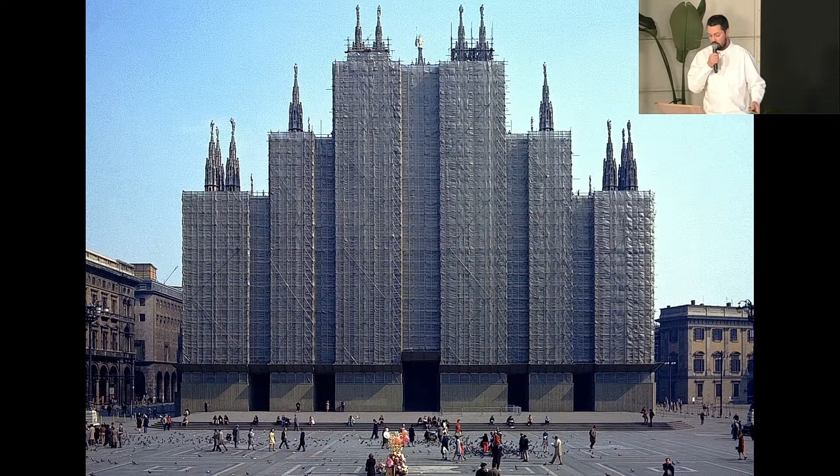Now I will show you a couple of spreads from this book. The obvious area where these structures exist is construction. The interesting thing is that scaffoldings and the things which precede buildings are sometimes much more progressive and innovative than the buildings erected behind them. For instance, this is a scaffolding of Isaac Cathedral in St. Petersburg, built 200 years ago, before the existence of modernism and all the new movements of architecture, and it looks much more unique than the building it hides, creating completely unique conditions.

Sometimes it also helps to hide things, and we all know these kinds of huge structures which stand in cities for years. Here we speak about the permanence of something temporary, hiding enormous construction sites, but excluded from the perception of citizens because they are just labeled temporary.

These structures also facilitate and help us do what architecture fails to do. They help us deal with climatic problems, such as the situation of Swiss melting glaciers, which was covered with thousands of square meters of textiles, or whole streets in Bangkok, where we used to teach, which were covered with this textile to provide more comfortable climatic conditions. Or probably all of you know these structures which appear during periods of Acqua Alta in Venice.

Obviously, safety comes first, and these structures, no matter where they appear, in which historical context, are always allowed to be as bold, as contrasting, and as radical as possible, because it's explained as needed for safety, needed for insurance companies, construction companies, and so on. They create completely unique conditions, and we all know these passages in probably all European cities which stand there for 10 years, but we never question their presence, their aesthetics, or their colors, because they're again labeled as temporary.

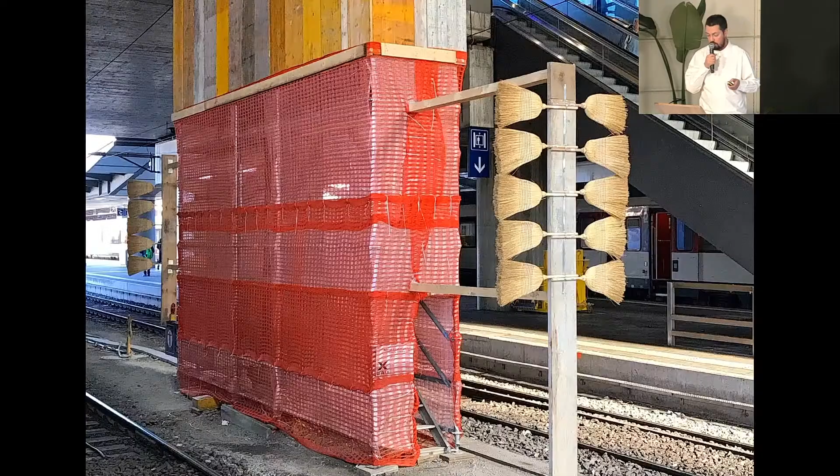And sometimes they come to quite unique examples, like this case in Switzerland with brooms which protect the trains. They sometimes look more decorative than the most exotic examples of postmodern architecture, but this decoration and ornament is purely functional. For instance, here the red lines basically prevent the workers from hitting their head, so it's marked with the color. Sometimes these ornaments come purely from structural reasons.

Sometimes, like these fumigation sheds, when buildings are cleaned by fumigation, they create completely exotic examples of architecture which are more expressive than some of the most radical works of Zaha or Frank Gehry, but they're done purely for these practical reasons.

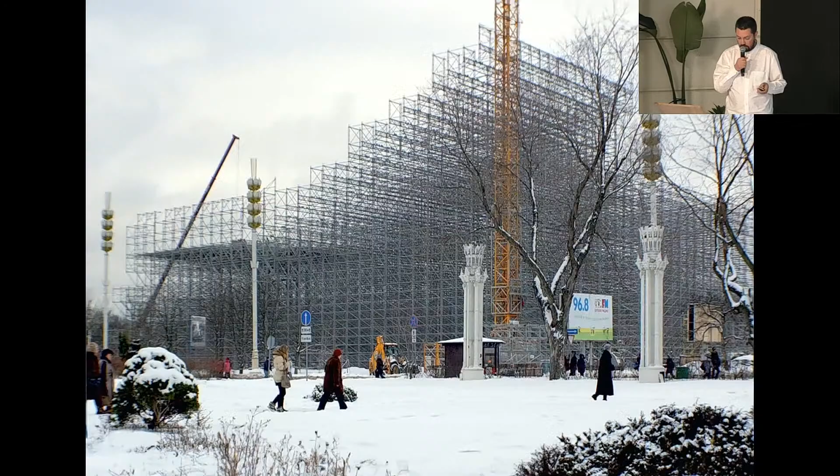They facilitate events, and they have a human scale, because they need to be deconstructed after these events happen very quickly. We can also learn that architecture at quite a big scale, which is constructed very quickly, can be done for deconstruction, for démontage. I will mention more about this later in our work.

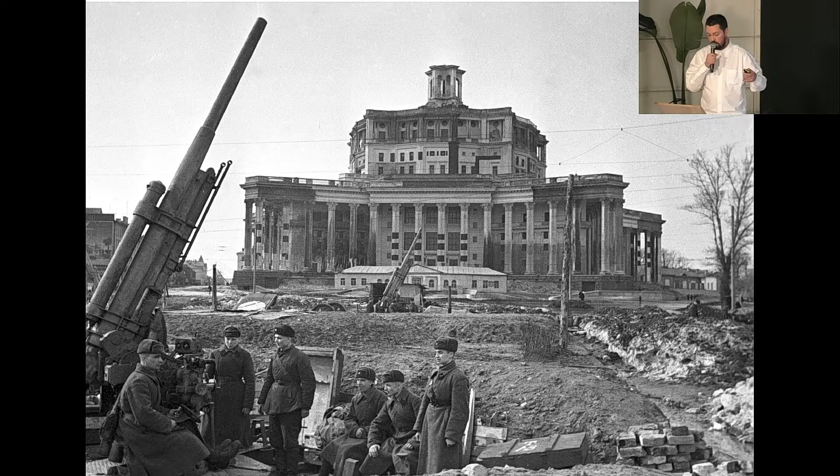And also, obviously, it protects cities during wars. Here is the suspended ceiling for American airplane production, or here it's kind of a drawing, like a layer of paint drawn on a theater during the Second World War, to pretend that this theater is a series of small buildings so it avoids bombing by Nazi aviation. It also protects buildings structurally, examples from the First World War and, today, the monuments covered in Ukraine. And also during social conflicts, like these boarded windows during the so-called Gilets Jaunes protests in Paris, which covered all the elite boutiques from the riots.

We can conclude that in a way this is a contemporary vernacular architecture, because it has the logic no one would carry scaffolding, these type of structures, from thousands of kilometers away for purely aesthetical reasons or for the choice of an architect. They are inherently ecological, smart, and economical.

Here we can see, for instance, bamboo scaffolding, a beautiful invention very used in Southeast Asia, which covers quite a generic building behind it in Hong Kong. This is another example of this vernacularity, the Swiss so-called Bauprofile, the markers of future existing buildings.

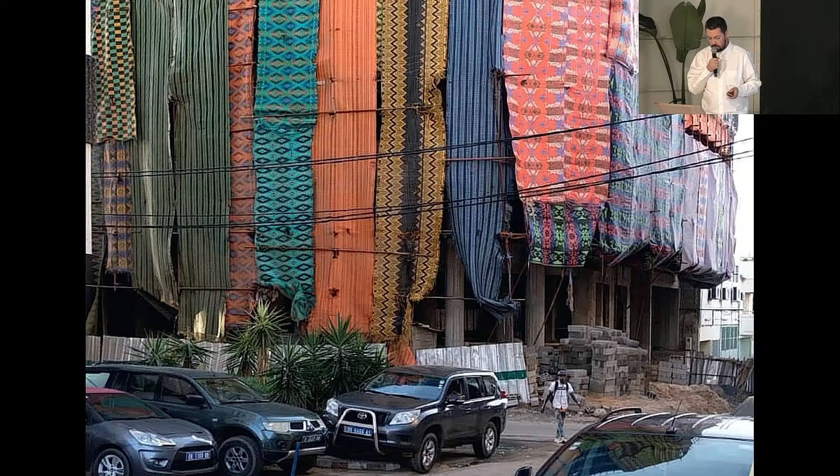To conclude this book, we make the point that these structures, we can really learn from them, and they create a certain new order. Similarly to how the Roman or Greek order came from construction techniques, all these structures create a certain new order that we can learn from, from its rationality, its modestness, its efficiency, its ecological concept of design for disassembly.

It basically doesn't leave a trace and can be reused in future. So everything we speak nowadays as designed architecture, what we are trying to do, already exists in this type of architecture. So I invite you to look through it, as it is now out in print.

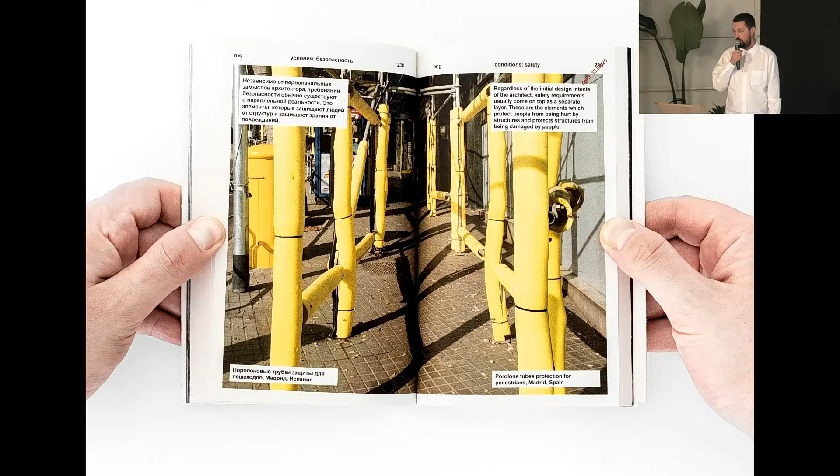So this type of architecture was many times our reflection and source of inspiration for our projects. The first important project in our office, which we did long ago in 2014, was called Emma Space, when we were requested to rethink an existing old factory which came out of function, a factory of medical instruments, but with an extremely low budget, and it was supposed to be transformed into a public cultural space.

We started to think of a strategy, and what we saw is that the whole territory had this kind of outdoor rooms, the spaces in between the buildings. So the strategy was to use these rooms and create a series of outdoor spaces, leaving the interiors almost untouched for this cultural cluster.

So we did this physical model where, as you can see, in all of these pockets, this is a building, but in the model we take away the building and leave a continuous wall, which we decided to unite these outdoor spaces into a series of courtyards.

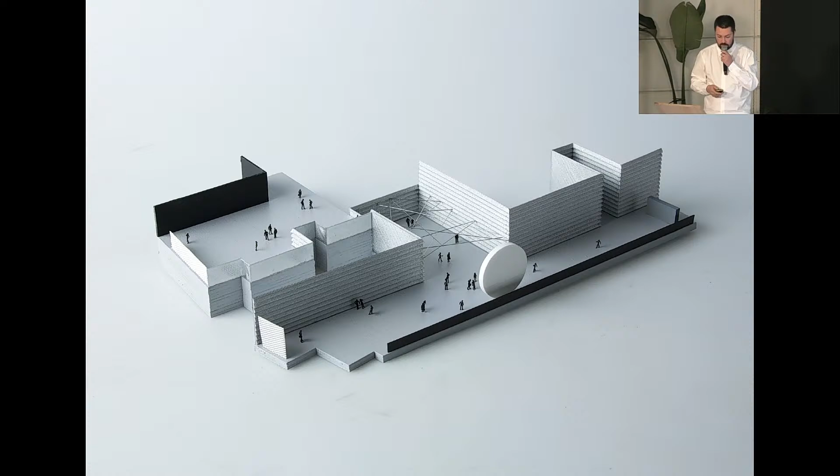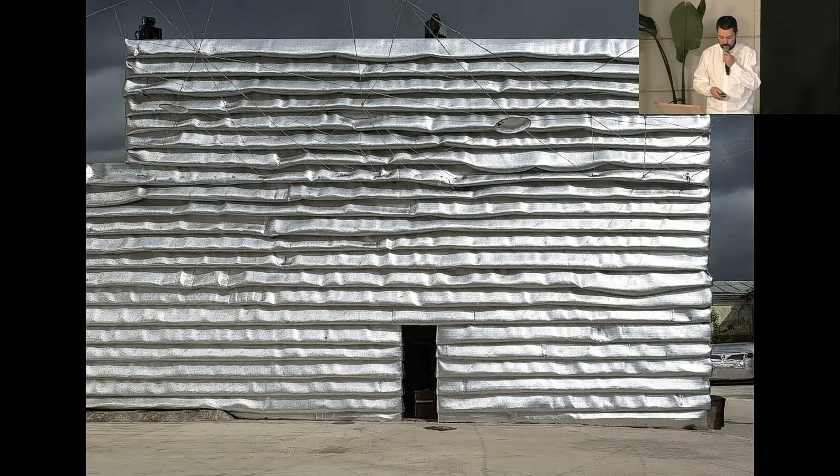In order to achieve this, this was one of the atmospheric renderings we did in the beginning, when we didn't know how to activate these courtyards, how to activate these open spaces, but we had this first inspirational image, and we decided to cover the whole space, including the windows, with so-called insulation foil, which is used for insulation of facades and roofs.

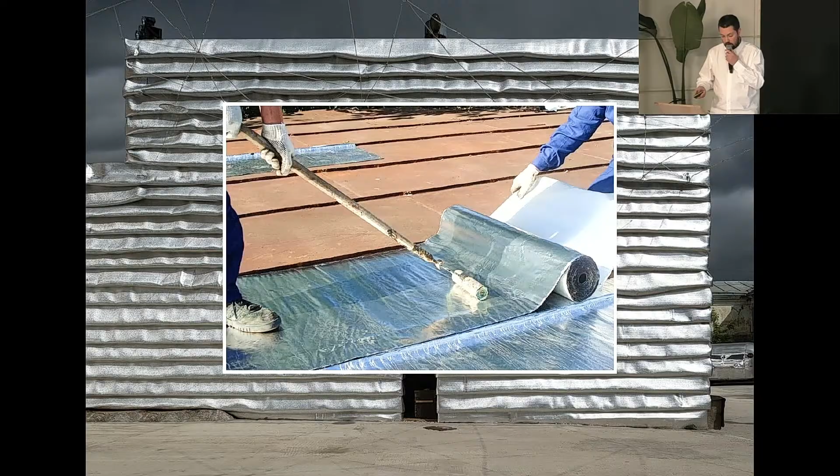We created this kind of detail in order to create a total atmosphere of this cultural cluster in this space, activating these courtyards for events, lectures, parties, and so on.

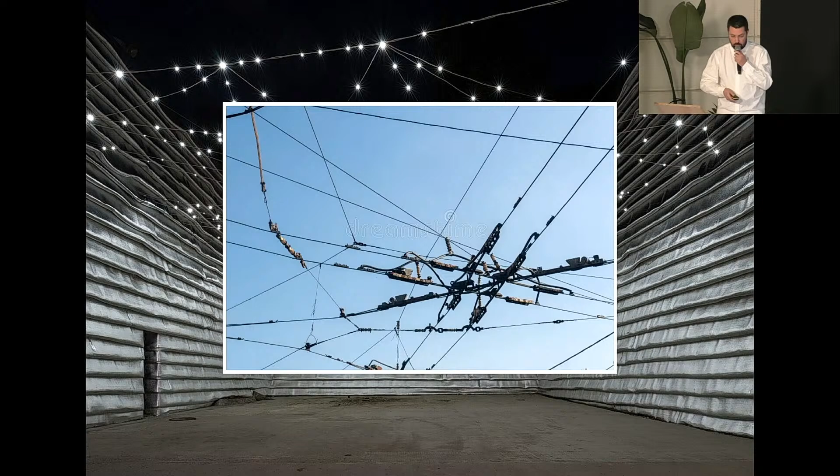Another solution we proposed in all the courtyards was this suspended luminous sky, referencing trolleybus wires, activating the space with a series of reflectors and lights. To make it more theatrical and to make a point, we created this huge disc which became the center of activity in this place.

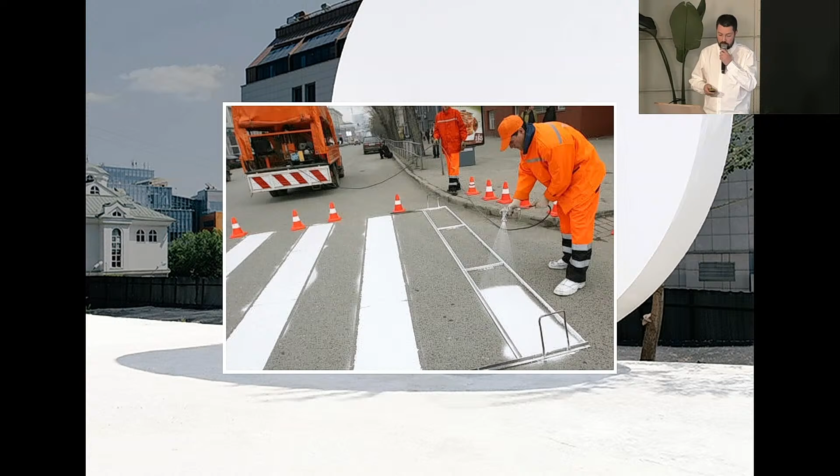It was a 9-meter-high, wide disc, used as a background for theatrical performances, music performances, DJs, and so on. It has this kind of unrealistic white color, because we used the road marking material, used again in infrastructural safety lining for cars, which has these white reflective particles inside, creating the illusion that this moon or disk looks more fake, more theatrical, and more like a cardboard moon than it actually is.

So it became quite successful back then, the project, and it was the first time we realized the power of social media and the tagging of the place. We realized that this physical and digital reality, which is now completely a norm, but it was just 10 years ago, that the digital is actually more important than the physical, because the space was later disassembled, but it left a digital trace. Inside, as I said, it was not at all touched, but through the cheaply renovated interiors you would pass to these courtyards, and even the people would be part of this installation.

The next project I would like to show today was built in Barcelona, and that's how I also appeared in the city and met some of you. It was called Permanently Temporary Pavilion, and we did it for Model Fest two years ago in collaboration with Parabase Architects, our Swiss-Catalan colleagues.

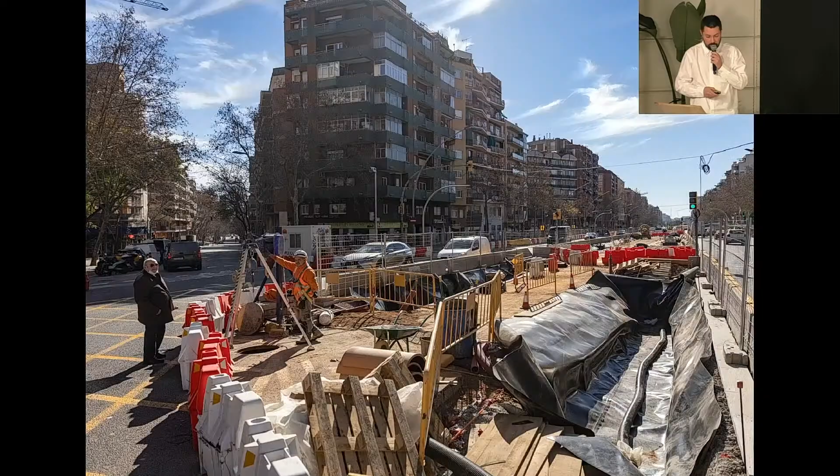The topic was called Entry Materials, and the question we put to ourselves was revealing the hidden resources of the city, because we constantly demolish more and more and build new buildings. But sometimes we can stop and look at an image like this, where we can see thousands of idle construction materials lying there. Together with our partners and the organizers of the festival, we decided to visit around a dozen different city civil storages of materials around Barcelona.

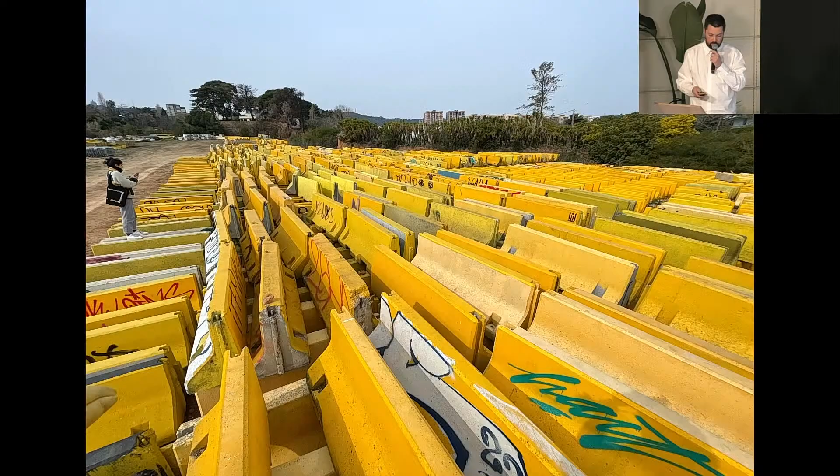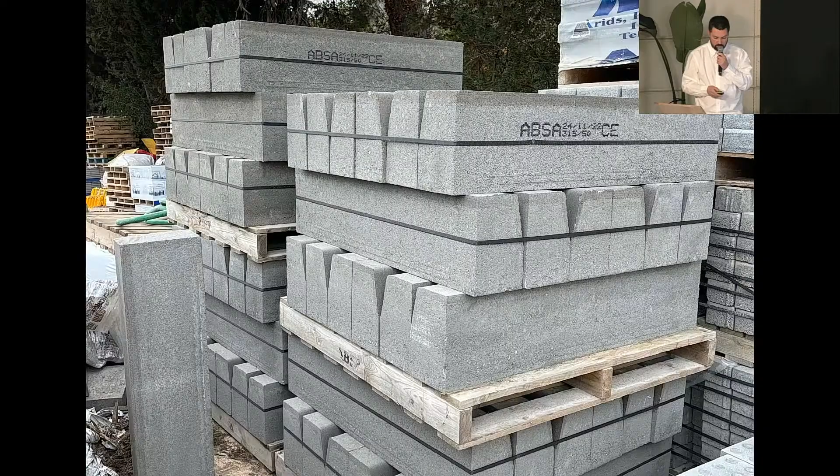We went to all the peripheries and started to realize there is an immense stock of completely new materials lying there for years and months without any need. There's lots of mineral materials. There's a place with 2,000 jerseys, which you probably all know as the typical road barriers, all types of woods and pipes, tons of asphalt. Some materials are even new, and they stay like this for years, waiting to be able to replace broken materials.

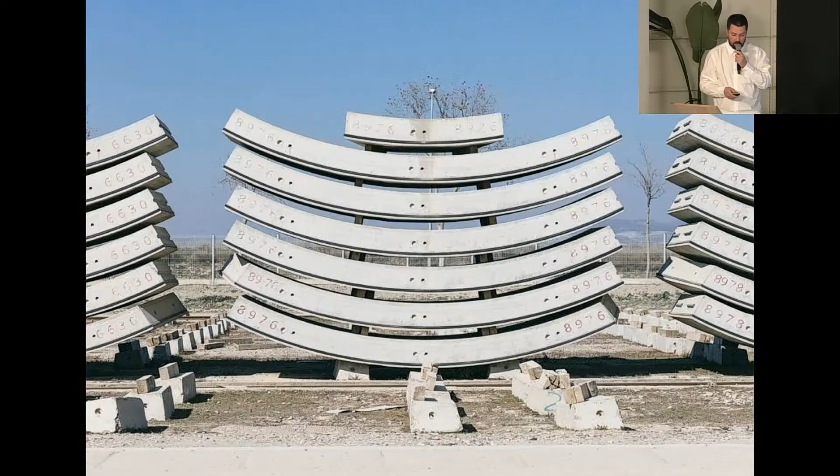We even found one concrete tunnel, pieces of which were given to us by the Sorigué company for some time, because they made a technical mistake, and they had thousands of these panels for a concrete tunnel lying somewhere, waiting for who knows what. Also objects that come out of season, because when you need to put water out, sometimes in winter you don't need these buckets.

One of the most exciting was, of course, the storage of the historical. Similarly to all these concrete blocks, there's also a huge storage of historical statues and historical elements, which we saw with the city of Barcelona, where we could choose a statue for temporary use. One beautiful building was this spiral, which Guillermo once joked was a 'trash Guggenheim' — like a Solomon Guggenheim museum but full of unused trash. We even saw Gaudi doors, and probably you all know the leftovers of Enrique Miralles' Tir amb Arc.

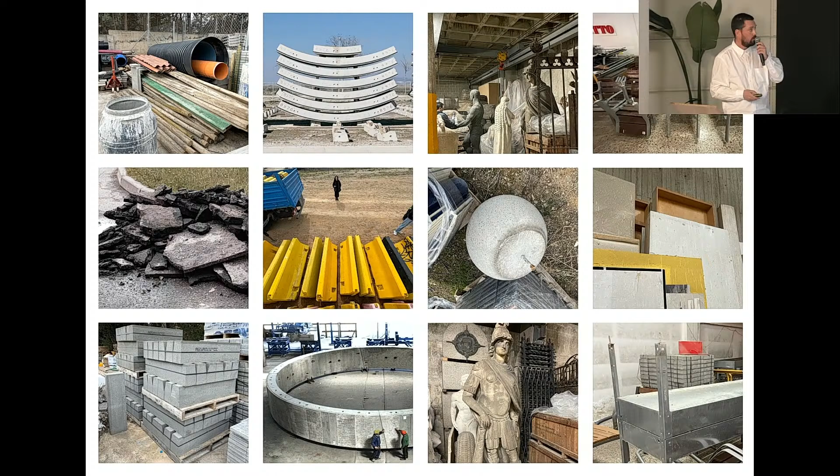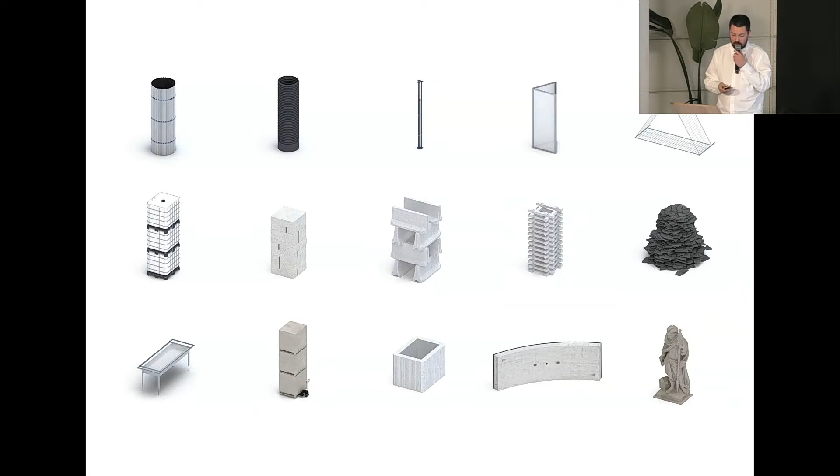After collecting, let's say, a catalog of all these materials, we carefully selected some of them, and the majority were mineral elements, because we wanted to underline that these temporary elements don't need to always be made out of temporary plastic or wood — if you just borrow materials, you can use any of them. And we created a pavilion which was standing in the Park of Glories.

The point of this pavilion was to inform the city of Barcelona about this phenomenon, to invite discussion on this topic. So it was used for different cultural events. Inside, the central column was made out of these water storages, so it looked like a lantern, and it was also the gateway to the Glories Park.

As you can see, it is a construction net creating a shadow, based on a series of mineral totems of different materials, and inside there was an informational table about the topic I've just discussed. In the evenings it was used to celebrate the thing.

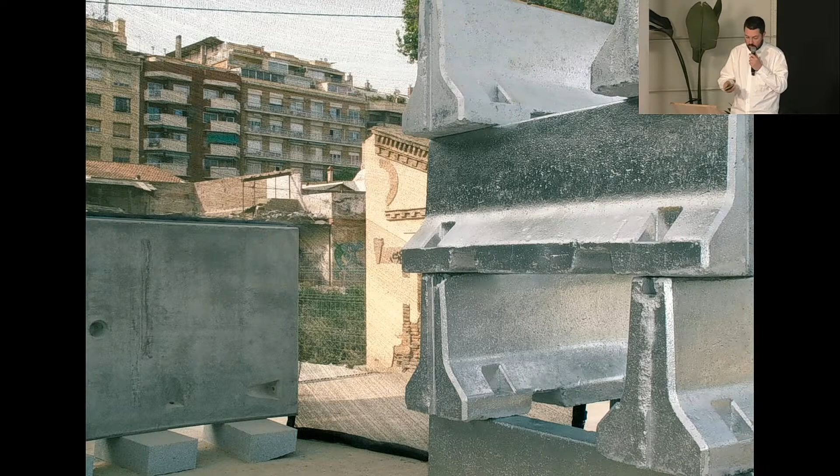For us it was also important to show that by rethinking the materials, we don't need to always use them the way they're prescribed by conventions and architecture standards. For instance, a sculpture can serve as a column, and the net used for scaffolding can be used as a roof. The jerseys can serve as storage space. It was very important for us to show this dialogue between the temporary and the permanent — we created a certain language with black lines of this temporary net hugging these mineral stone materials, including benches made from stacked asphalt plates.

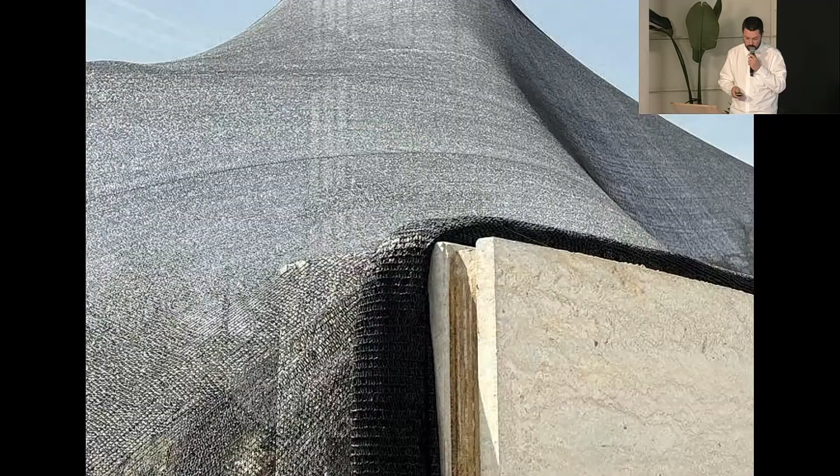We also did a couple of workshops here with the Barcelona people in order to use all the materials we collected to create a series of furniture objects. So it was a bit like an educational project as well. And most importantly, the whole pavilion was fully disassembled and went back to all these multiple storages.

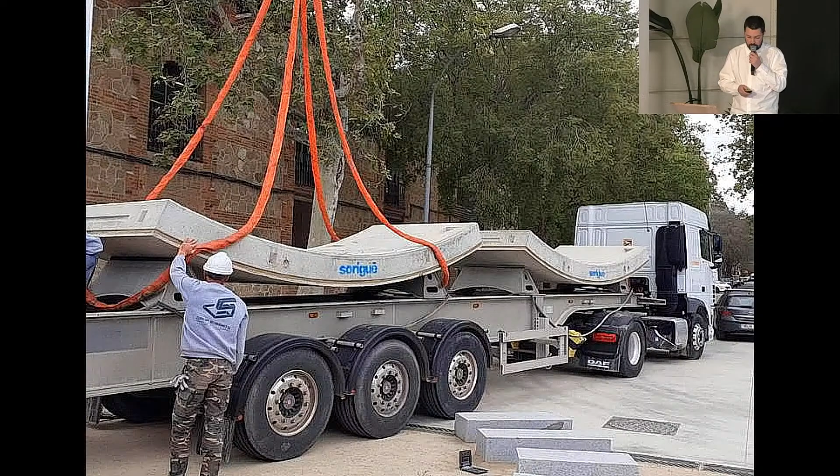This shows these Sorigué plates coming back, for unclear reasons, laid down somewhere in the fields.

But thinking about this concept, we started to think more and more, and now I'm even teaching a semester dedicated to this topic: how can we use this concept of disassembly in much more serious structures, not just a small pavilion with a free function, but in real construction.

Here I'd like to present a competition project we did in collaboration with Jan De Vylder, Inge Vinck, and Professor Philippe Block from ETH. It was a tower competition, an office tower designed for the city of Zug, a small, quite innovative city in Switzerland.

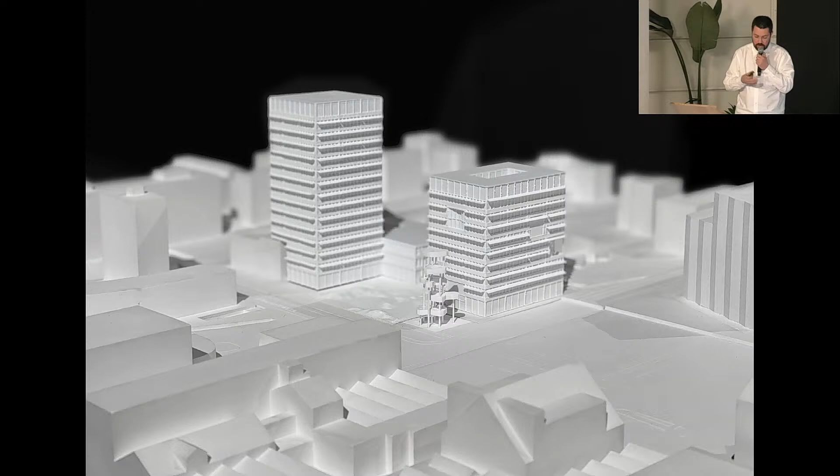The point was they wanted an office tower, but due to COVID, offices are now idle. We thought, really, another office tower, when we know that in a couple of years maybe this function won't be relevant? So we decided the tower should adapt to future changes, anticipate other functions, and even potentially be disassembled. We were given these two quite simple volumes—this is already the final project, but the geometry itself was not questioned.

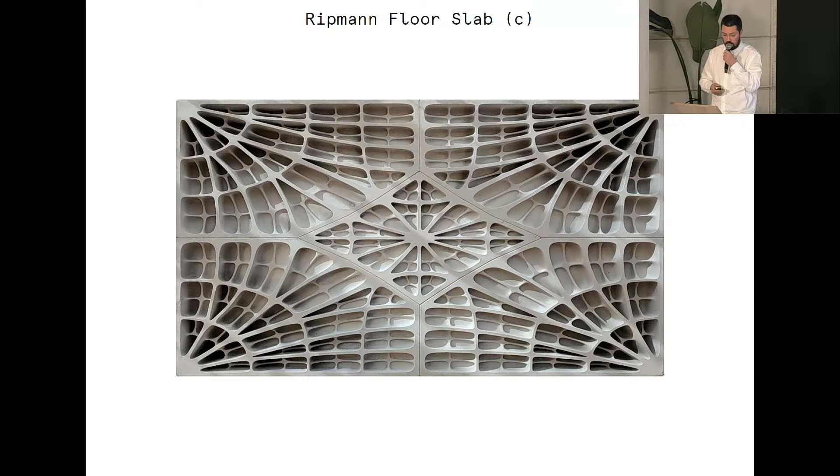We started with an invention of this gentleman, Professor Philippe Block, a very good engineer and architect from ETH Zurich—check out his work if you don't know it. He works with very thin stone and concrete shells, and in particular he invented the Ripmann floor slab.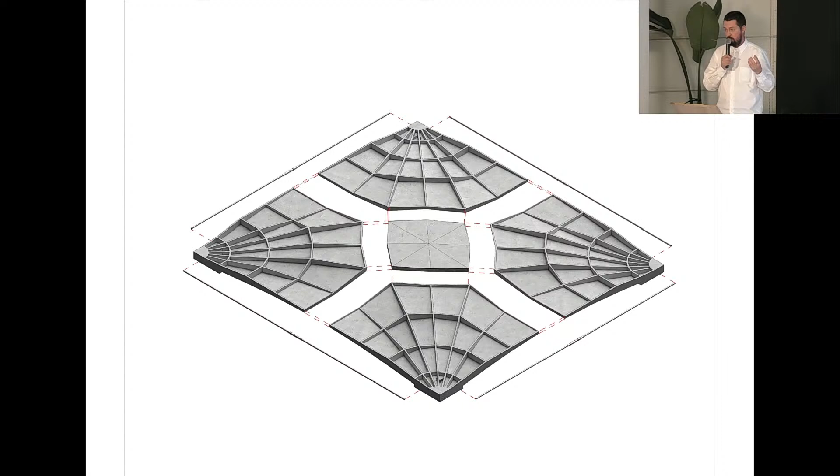Here is an adapted version for our project: a slab which works on the same principle as the vaults of medieval cathedrals. Thanks to these ribs, it's much more stable, and therefore it reduces the amount of concrete used—up to 40% less than a normal flat slab.

The amazing thing is that this Rippmann floor slab works like a simple arch with a keystone in the middle, which allows full disassembly.

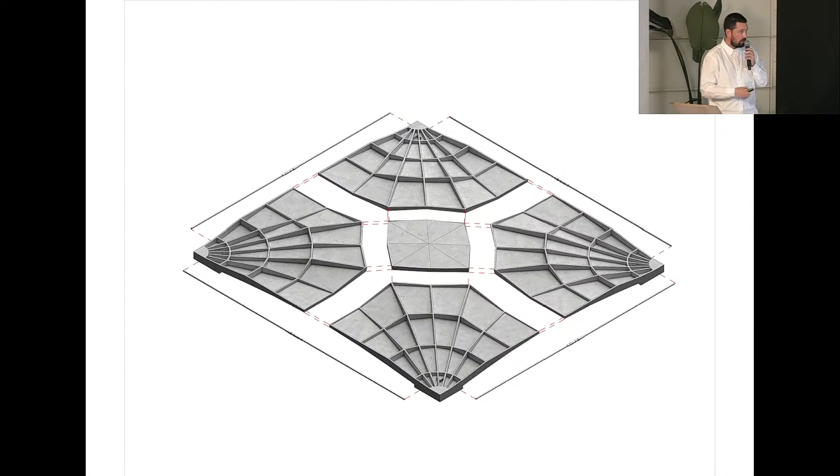So we started thinking further about the layout of the project—here's a little diagram. On the left we call it the Miesian skyscraper, in the middle is something like the Lloyd's building by Richard Rogers, and we wanted to propose a new way of organizing the cores.

If I think about why we lost this competition, maybe it's because we touched the idea of moving the core. This was also part of the competition's premise—that in the future not only can the building be demounted, but even the cores, which seem to any architect like completely unmovable objects, can potentially move.

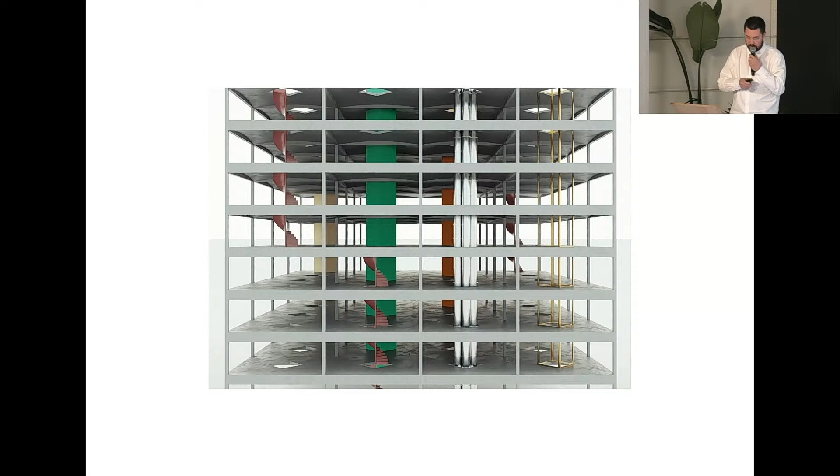Thanks to the slabs being organized in plan, you can theoretically shift the cores both in plan and in time.

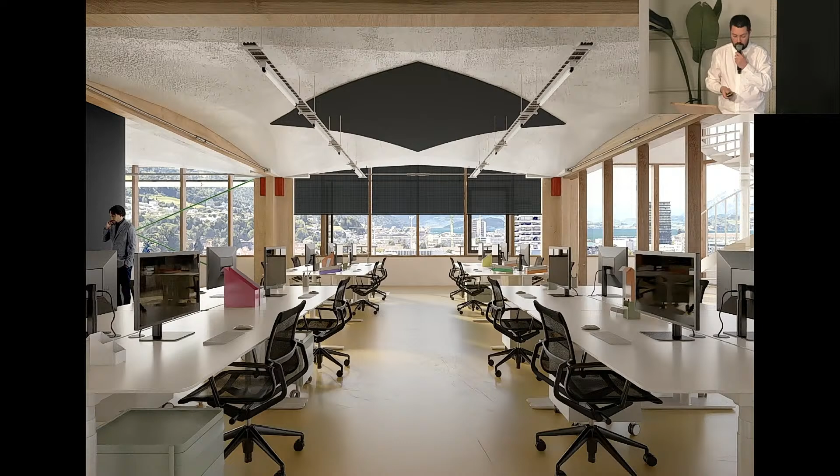Here you can see the interior of this project, showing an acoustic panel that covers the middle keystone. Together with the ZPF engineers, here's a little explanation.

We came up with the idea that the whole building should be made out of wood, and also fully disassemblable wood.

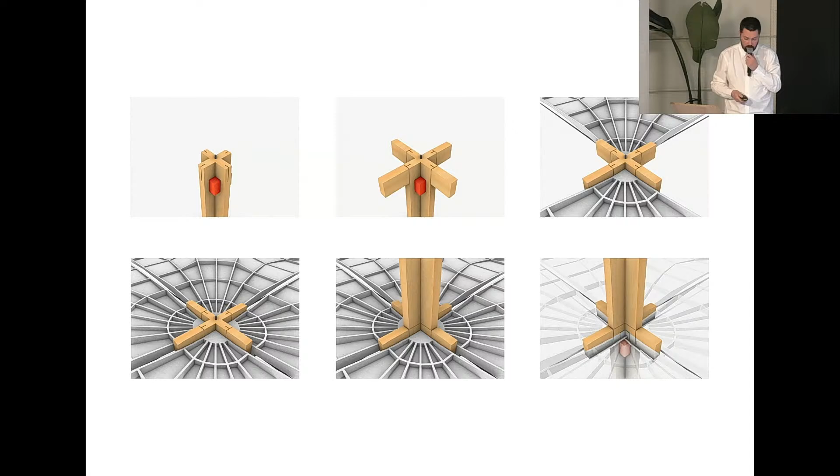Here you can see the joint combining the wood load-bearing carcass—the bones of the building—with the Rippmann floor slabs. Here's another zoom in, and that's how it looks in the interiors.

And further on, all the facade elements, the solar panels, the idea was that they also potentially could be disassembled. The outside look of the building is pretty simple, but as you can see with lots of joints, it underlines this idea of future disassembly.

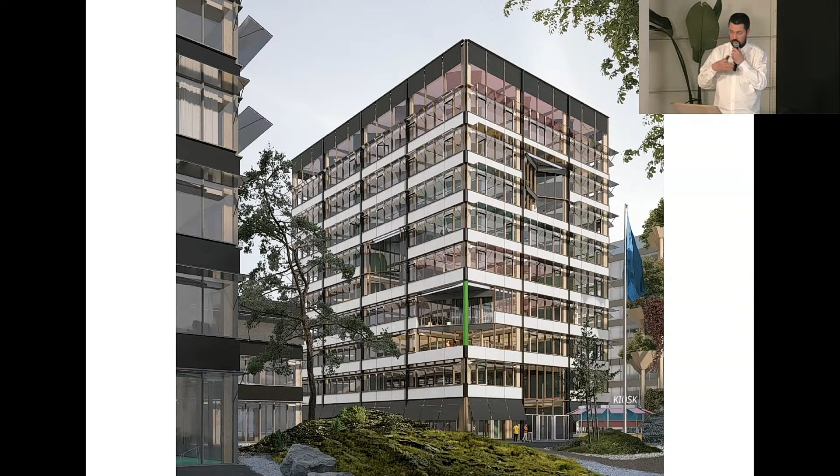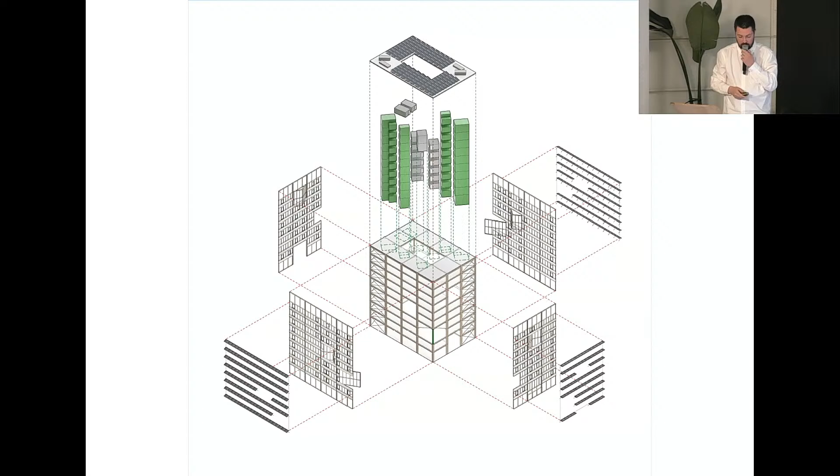And it also allowed us to introduce a series of atriums and niches inside the whole building, which can go, so you can disassemble a whole module of the building, allowing double height spaces to appear all around the building. And here you can see the exploded axon with all the elements that I have mentioned.

And inside we try to also, equally to the logic which I spoke about in the exterior, underline all these details of construction, which would then become the ornamental elements of the design.

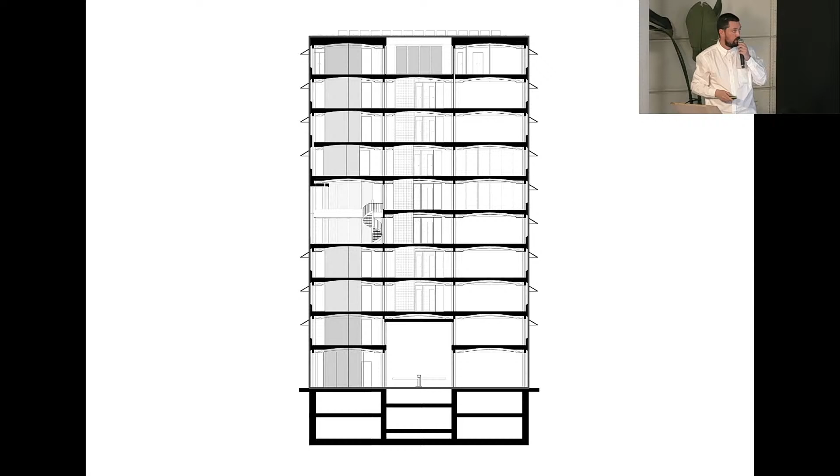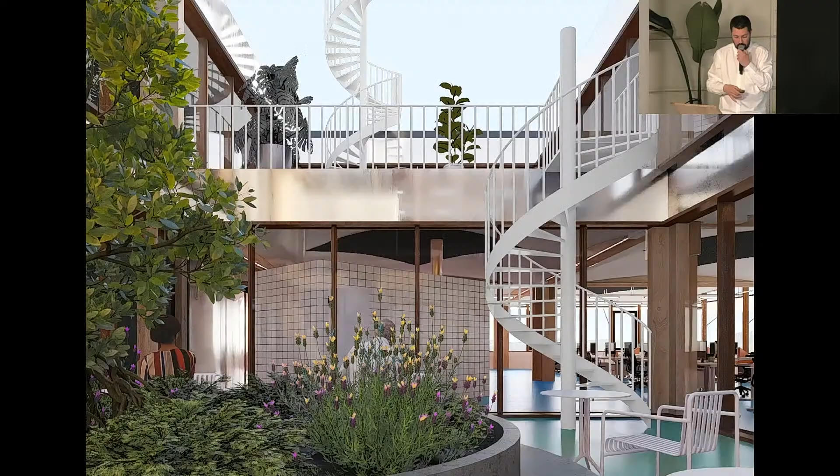And here in the section you can see the kind of migrating double height atriums in the space. And here are just a couple of examples of these double height areas in the buildings, which could theoretically in future change their place and function, including also a rooftop kind of recessed area, which is also thanks to the fact that here the slabs are fully demountable.

So this was the project where we tried to really address these issues in a serious, big construction project. And at the same time, unfortunately, this project didn't win. I think maybe it was too complex in this sense, although we all believe that it's fully doable. But obviously this type of thing, coming back to a different scale, is much easier in small projects.

And here I would like to show you a little project we did in Logroño for Concéntrico Festival, which is called Off-Season Pavilion.

You probably all know Logroño, the place of winemaking, and we wanted to show the infrastructure behind this industry, which goes behind this postcard wine production, these images where you drink wine on the street. But actually behind these touristic appealing images of Logroño, which we all know of Rioja, there's a whole industry of winemaking.

And we found out that there's so-called jaulones de vino, humongous metal cages for wine, which look like this, and they can host hundreds of bottles.

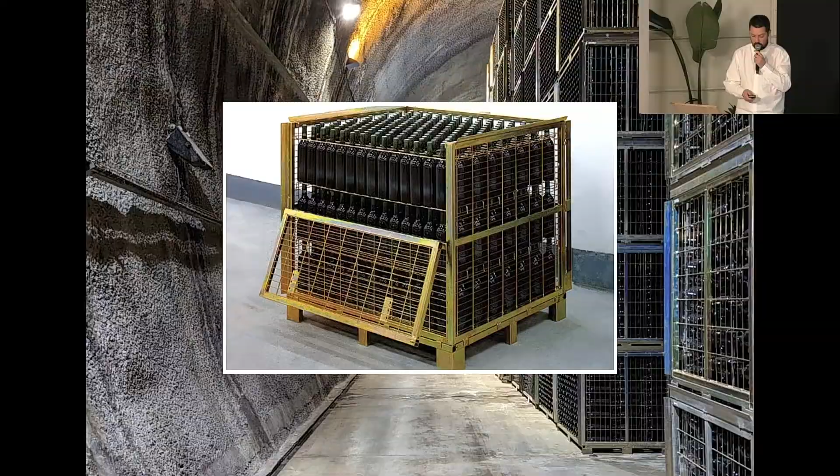And the most interesting thing is that we went there in winter, and they're standing literally more than half a year out of use. So there are thousands of these cages in the outskirts of Logroño which stand out of use.

So after contacting the producers, we decided to use them as the only element for our pavilion, and created a little public space, a little pavilion, fully made out of borrowed jaulones de vino, creating a little kind of replica, like a little mini chapel or baptisterium, with no big function.

So it was a very simple construction, also with 3 naves, and they were simply put together in order to create a temporary public space, a temporary shadow, and a place for people to gather.

And the interesting thing is that, as you know, the Concéntrico Festival has a very small budget. It's a small festival organized by the city, but thanks to the idea of just purely borrowing these cages and disassembling them later, it allowed us to exceed the budget like 50 times. So if we would buy these materials, it would be extremely expensive, and it was purely for free thanks to the producers of these wine cages, and it served its purpose.

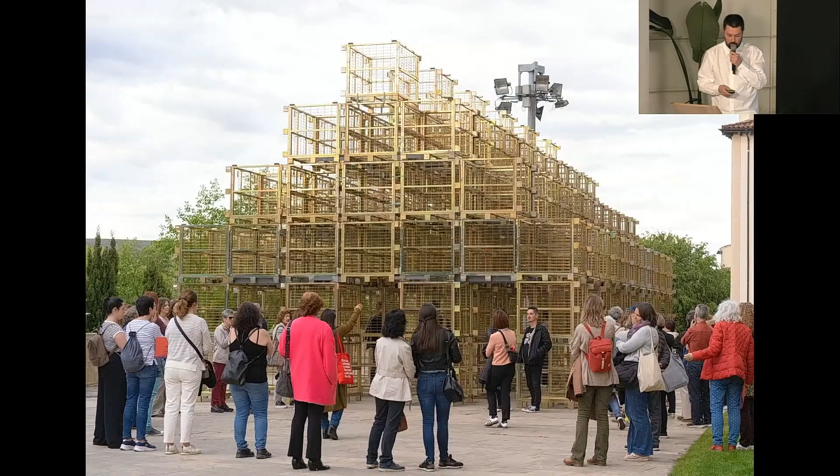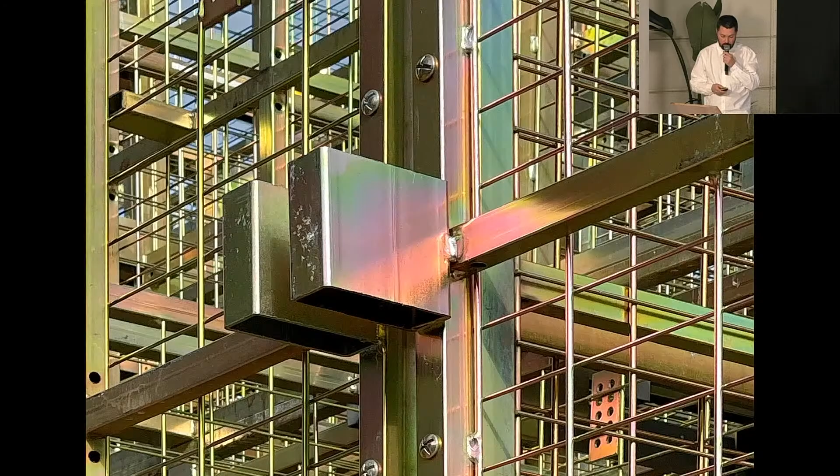It gathered people together. It created a nice space and a nice play of shadows and light. And what was also quite impressive is the way it's produced. So thanks to anodizing, it has an amazing color.

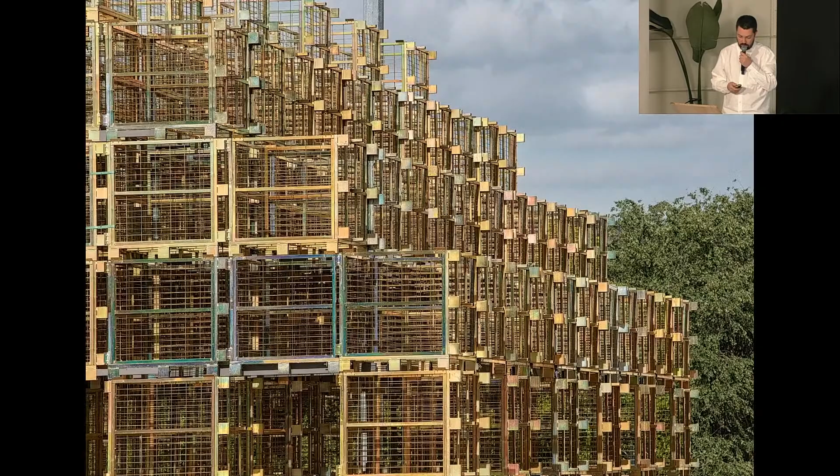And we did not treat this material anyhow. It was right there in this play of colors, and you can see all the shades from dark blue to pink. And they purely appear because of the practical treatment of these cages.

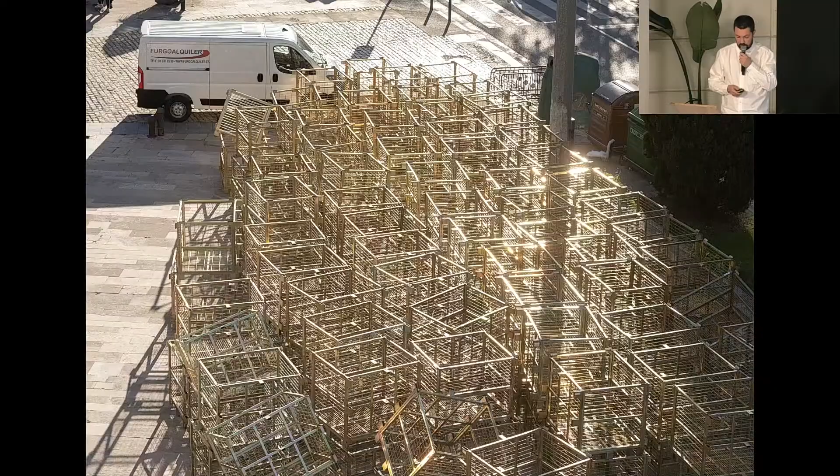And later, as with the previous projects, these cages were disassembled and went back to serve during the season to store the wine.

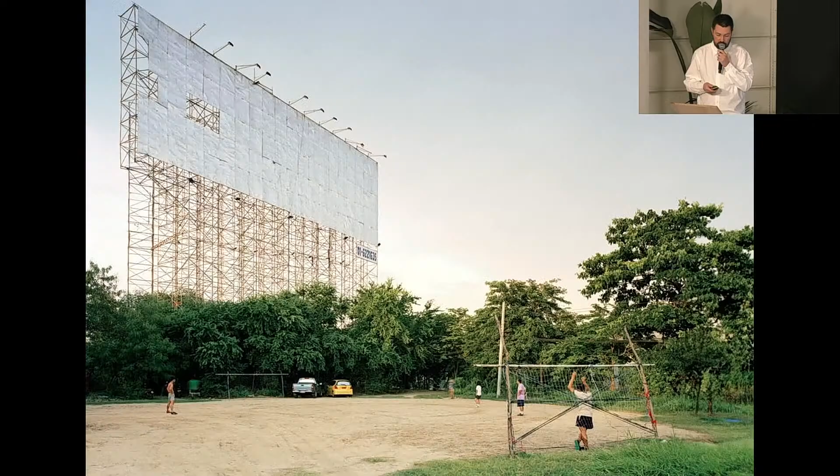Maybe to finish this chapter of temporary buildings, I'd like to show you a sports center, which was a temporary building designed very quickly for an event. This event was the World Football Championship, which was in Moscow in 2018, and it was a very big but very quick event. Designing a temporary pavilion for this, we thought: how do we build this structure, but how can it withstand into the future? We thought of a reference of a billboard, a simple infrastructural element which is easily constructible and serves the maximum purpose with a minimum of means.

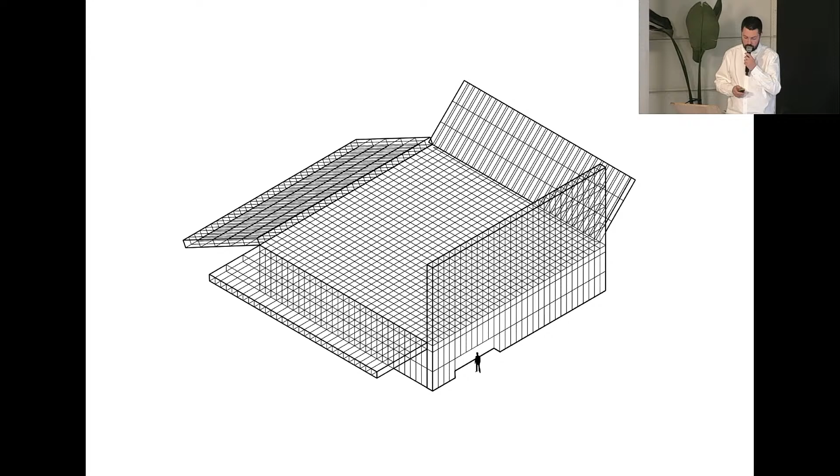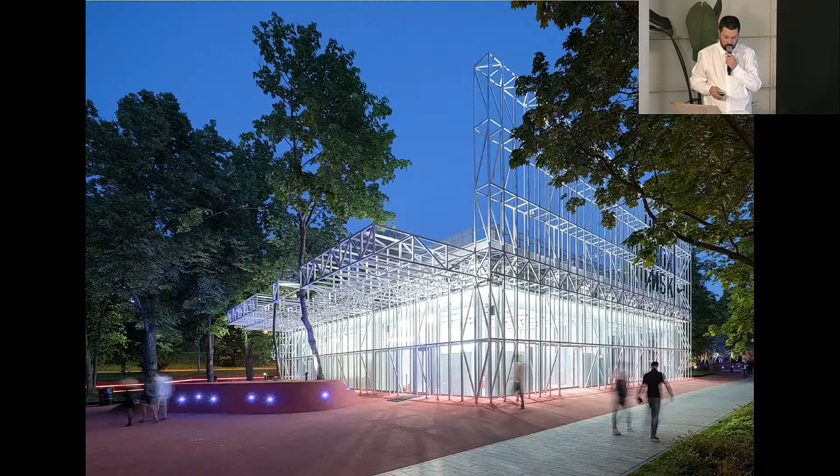We tried to make a kind of billboard infrastructure for human activities, and created a simple box with 4 different elements which can host different functions. One of them served as the score table, one was used for people to go up to the roof, one was a cover for the running club, and one served as a billboard for this event in this building.

This building was built as a temporary construction in Gorky Park, the central park of the city. It was built with a very shallow foundation, and the idea was that it doesn't cut any trees, so indents were done in it.

It served its sportive function. There was a gym, a training room, showers inside. It also served as a public space, and the shadows it created formed a series of climatic layers in order to protect the interior from overheating.

In this project, we called it the concept of the naked building, the building which reveals all the processes inside. On the right, you can see the server room. On the left, you can see the training storage room, where all the materials are exposed on the facade, and the internal passage of the building allows you to go through to the basketball court, football court, running track, or the outdoor gym.

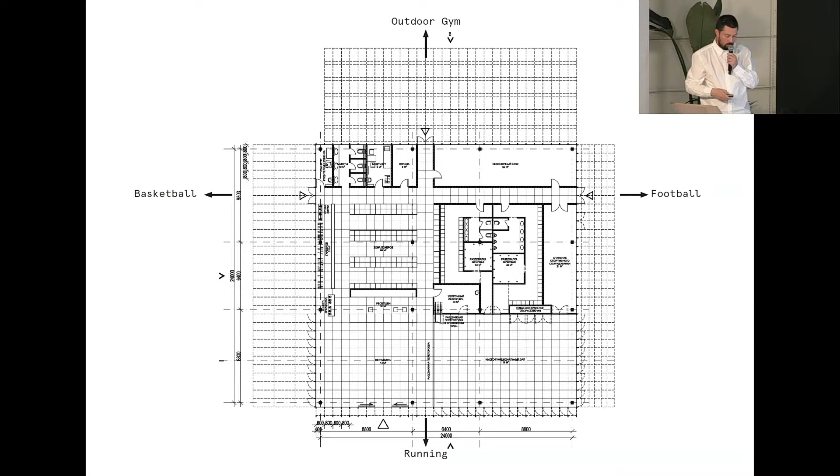In the plan, it's built as a simple cross, which allows you to go from the central core to one of the physical activities. That's how it was standing in the park, activating several sportive zones around it.

The only non-transparent, closed, and non-neutral colored space was the space of bathrooms and lockers. The idea was that the sportsmen there get motivated to run out of this red interior into the greenery of the park.

What was interesting is that it started to serve, even during the event, not only as a space for sports, but as a space for conferences and lectures.

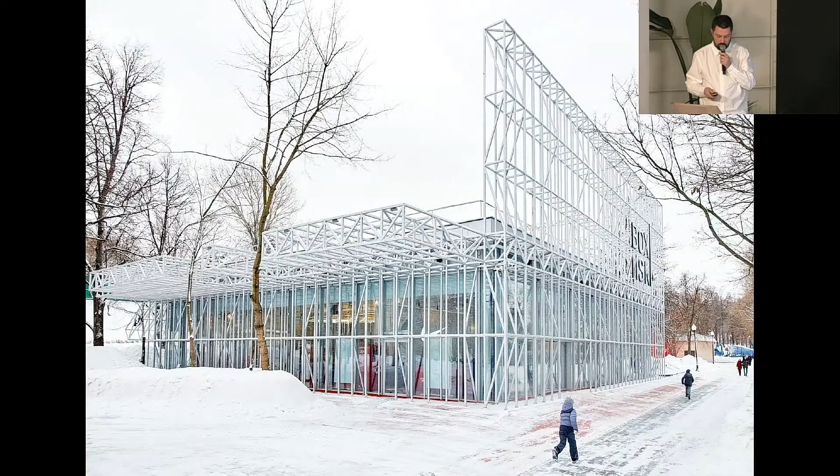Funny enough, after the event finished, it was supposed to stay there only for a couple of months. It's already 7 years standing there now, and it started being used for completely different functions, from pumpkin cuttings to children's events to cinema to shop to lectures to workshops. It was an interesting twist how something designed as temporary can stay for quite a long time.

Now I'd like to shift to a couple of projects dealing with existing structures. Currently we are working on around 6 projects that engage with historical context, from a winery in France to a couple of houses in Switzerland.

Here I show you 2 which are still in process, one in Switzerland, one in Austria, where we also think about how the buildings change in the future. Both of them are transformations.

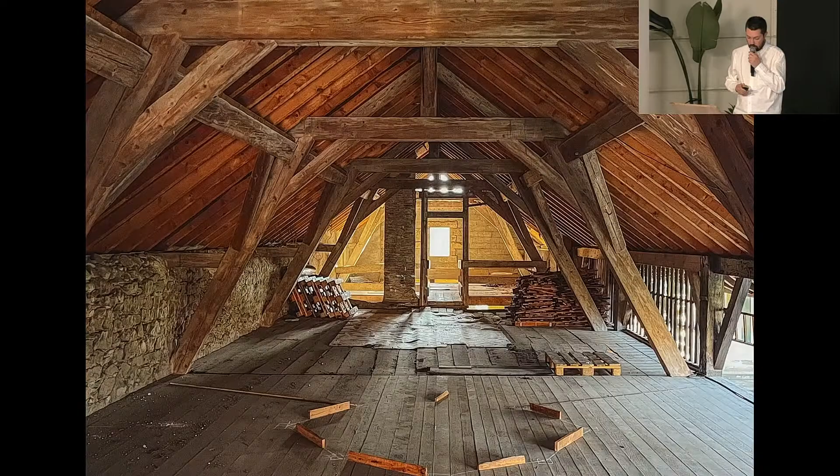The first one is a house in Eysins, Switzerland, a transformation of an old barn. It's a very small and picturesque village where the owners own a big house, what they call a chateau. This house has a little barn as a dependance, a little secondary building. It's a very long, beautiful historical structure, but it has almost no source of light because it's made out of long stone walls, and inside the interior looks like this.

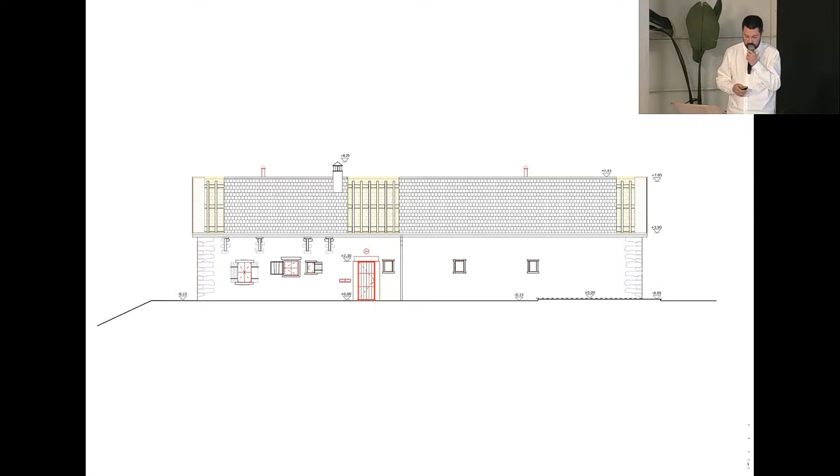The idea now is to transform it into a couple of apartments. The main question in front of us was how to give light into this building, and how to make it livable. So we thought of literally cutting this building, like Gordon Matta-Clark once did, in order to create a central space, cutting the roof to create these pockets of light.

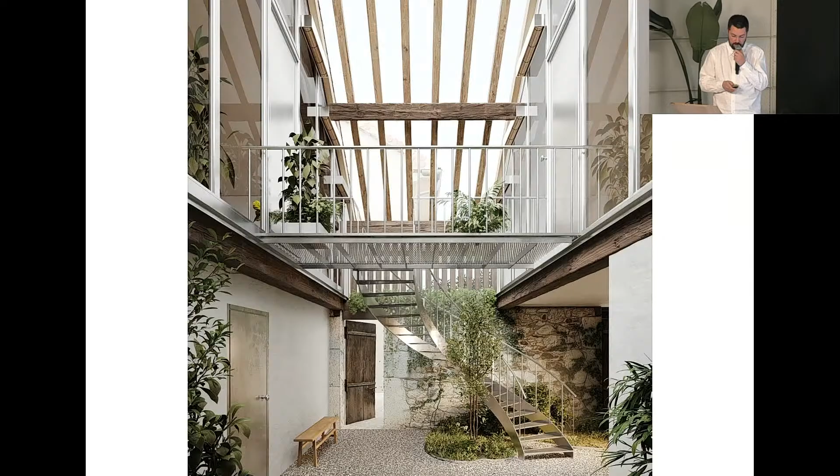And that's how we proceeded with this building, creating, as you can see, this is a ground floor. You enter into a little patio, fully open to the environment, where the rain and snow fall. Towards it, two vis-a-vis little apartments are looking. Here you can see the two apartments with a little courtyard, one for a smaller family, one for a bigger one. On each extremity there is a similar movement in the shape of a balcony, so on each end of your house you have a little balcony as well.

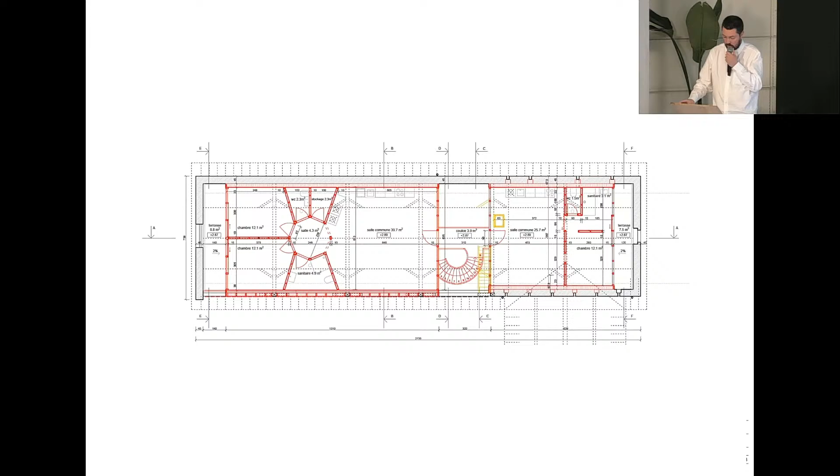This wouldn't happen otherwise because this building is a protected building with a certain level of protection—not the highest one—which allows certain transformations but doesn't allow changing its exterior walls. That's why we had to work only within the building, creating these conditions inside it. Currently it's a very long process because the negotiations take a lot, but we are hoping to see it realized soon.

Here's a little funny detail. When you go to one of the living rooms, maybe you've seen this moment of rotunda, where we made all the doors—from toilet and storage to your sleeping room—the same, in order to create a beautiful, yet a bit like Alice in Wonderland moment in this house. Then through your sleeping room you get to one of the balconies on the extremities of the house.

Another building, which is almost finished now, in its last months of construction, is the house in Vienna. This is a completely different story—it's basically about two rather separate houses which are united by one roof.

When we speak of Vienna, we of course have one image in our head, but actually not many people know that this is also one of the peripheral districts of Vienna—technically Vienna city—but there the context is completely different. It's this kind of spreaded little houses, and the clients had this quite ugly 1970s cottage, which they completely didn't like and even considered demolishing. It had not only aesthetical problems, but also not a very nice and not very interconnected plan.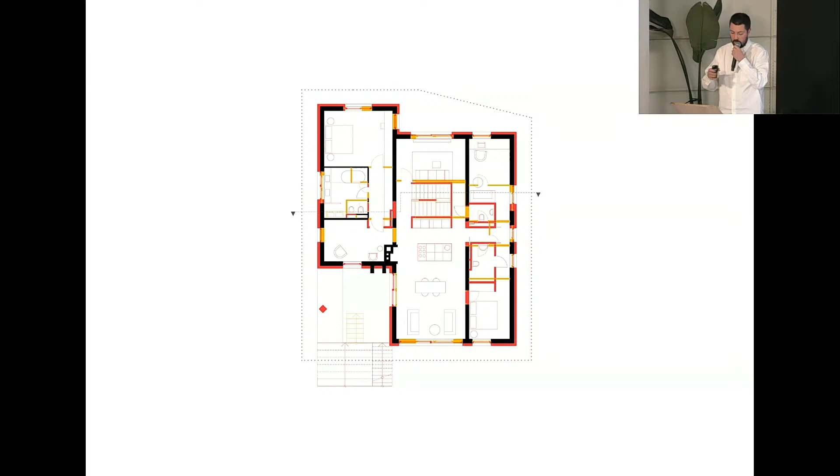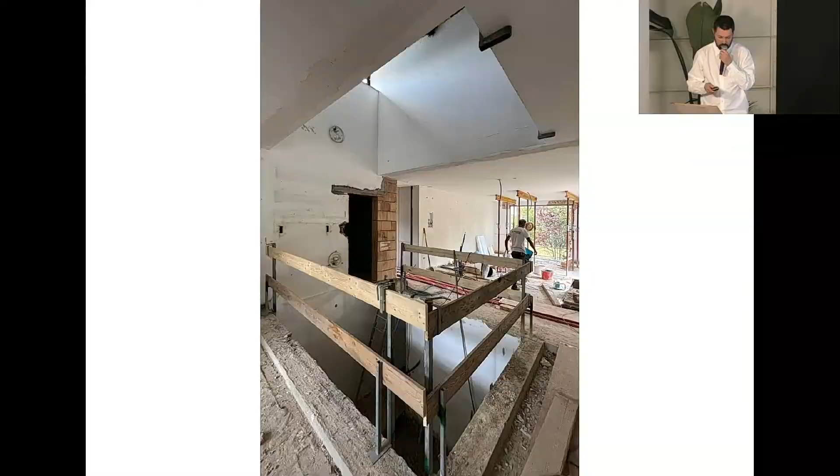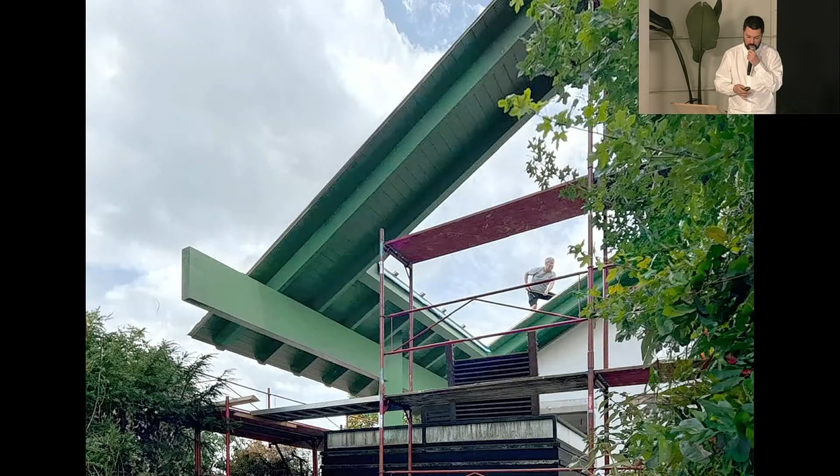The second movement we proposed was a careful opening of multiple areas in the building through a series of cuts which connect different rooms to each other, different levels, and interior to exterior. Here you can see the yellow-red plan showing the small demolitions we made in order to create this interconnectivity between internal spaces, levels, rooms, and layers. You can see how the interior openings rhyme with the exterior ones, and how the house reveals these new interconnections.

This is working, at the same time, with the one massive, emblematic roof, which was also made with a series of cuts for this building. These cuts create this connection, and they work not only on the scale of the building, but also on the urban scale, where the cut in the roof becomes like a local small icon.

Probably the last project I'd like to present today is a series of works we've done in the mountains of Georgia—projects where we again speak about working with rather scarce resources. I'll explain why. Basically, our client is a community in the mountains of Georgia, on the border with Azerbaijan, already in a very, very beautiful area.

And they're quite fun and creative people. We got this commission through Facebook - they literally wrote a post saying 'we need an architect for our kingdom,' that's how they call it. So we became the kingdom's architects.

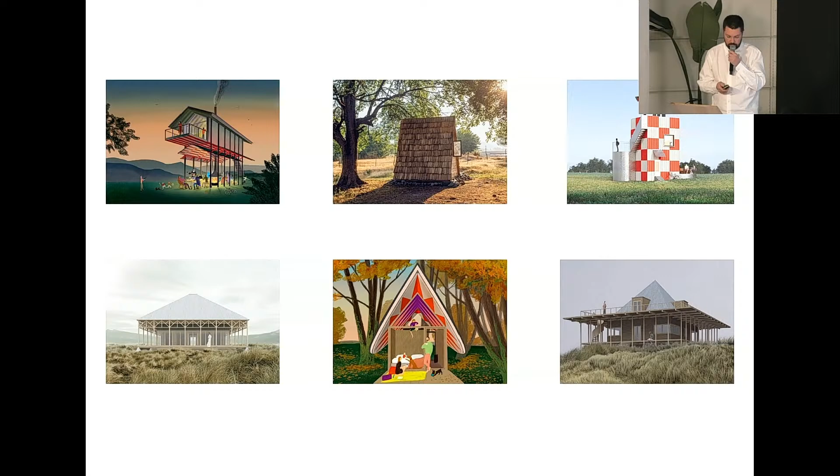The first idea was a concept of small typologies of primitive huts, which test different construction methods in order to see which quick local construction methods work better. We created a series of projects, some of which are realized, some were not. One of them, which I'd like to show, is the Tin Can Castle.

Originally it was even used as a shelter for refugees coming at the beginning of the Ukrainian war, so it was really an urgent project for them, and it was fully built for 6,000 euros.

We realized that local resources are very important, coming back to the neo-vernacular type of architecture, because some ideas we had, they simply couldn't realize, even though these ideas were very simple, just because they didn't have skilled hands, skilled workers, or materials.

One of the local super popular materials is these corrugated sheets, and that's why these first shelters are called Tin Can Castle - a little chateau, but made out of this metal.

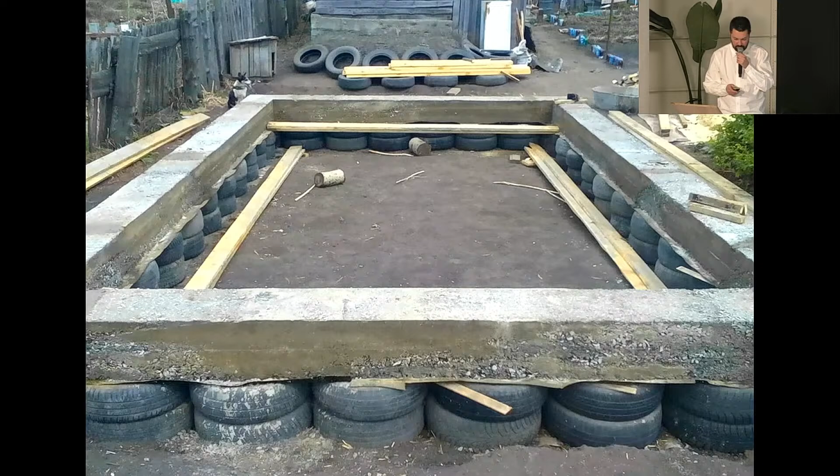We also observed local techniques such as reuse of tires, these sticking-out protruding roof structures, and stones which are used to counterbalance the wind.

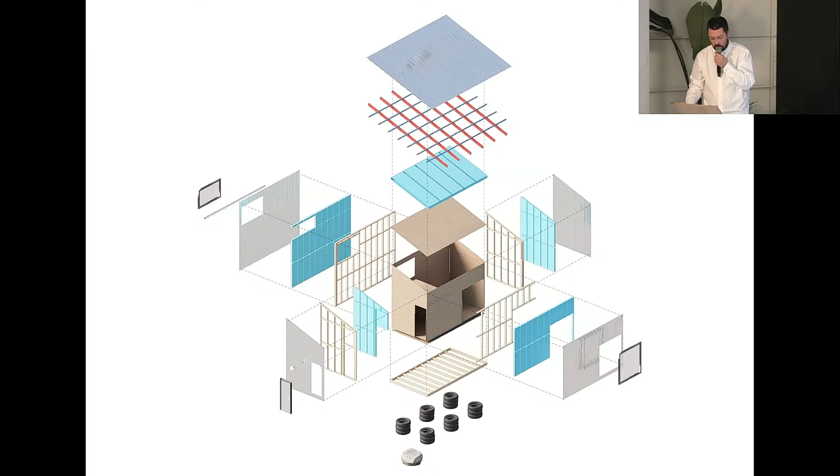When all of this was done, we created a manual of how to construct these little huts, so that the community could actually do it themselves - that's how we achieved such a low budget - of course with some workers.

Together with everyone, including the local chef and the kids, they managed to build a series of these little cabins in the forest, populating the area around the river, using the lessons we learned from the local construction techniques.

One little detail I'd like to mention is that we wanted a special window there, so we just bought the cheapest plastic window available and rotated it 45 degrees to create this effect. It's actually a super simple and basic solution.

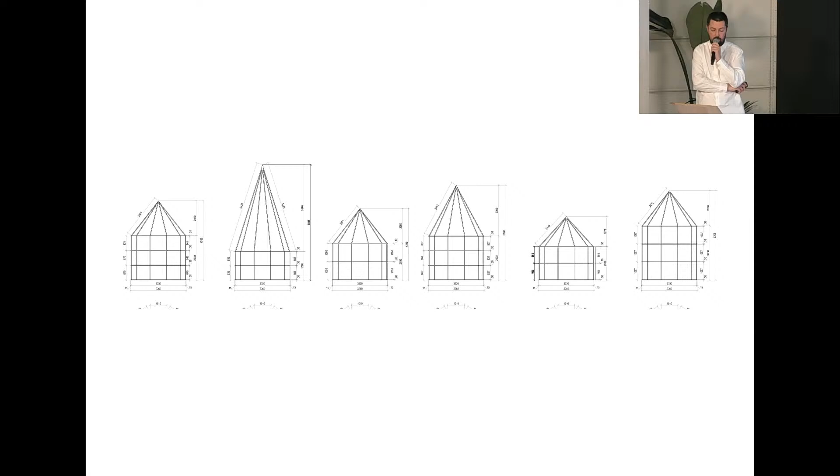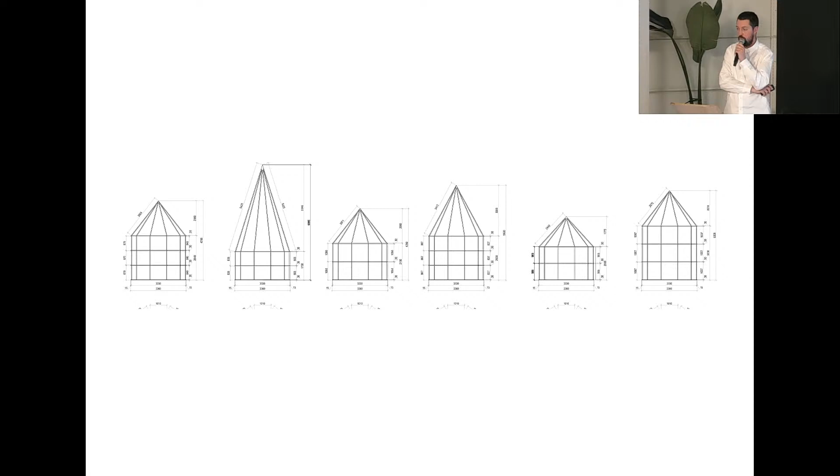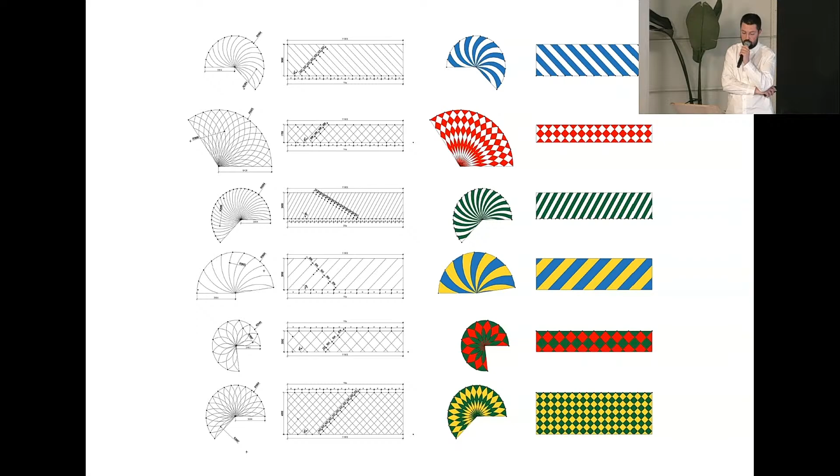We thought that the only instrument we could work with for diversity in this architecture, without increasing costs, would be color. So we created a series of patterns, and out of textile created these little tents, which not only worked as the first shelters for this community, but also as lanterns in the night.

It also created some funny moments when someone was doing their private things in this shelter, in these lanterns, and it was obvious to everyone what was going on there.

Finally, speaking again about permanence and impermanence, these things which were planned for quite a short time - because people really liked them, they survived a storm, a hurricane, a flooding, and even rare but beautiful Georgian winters.

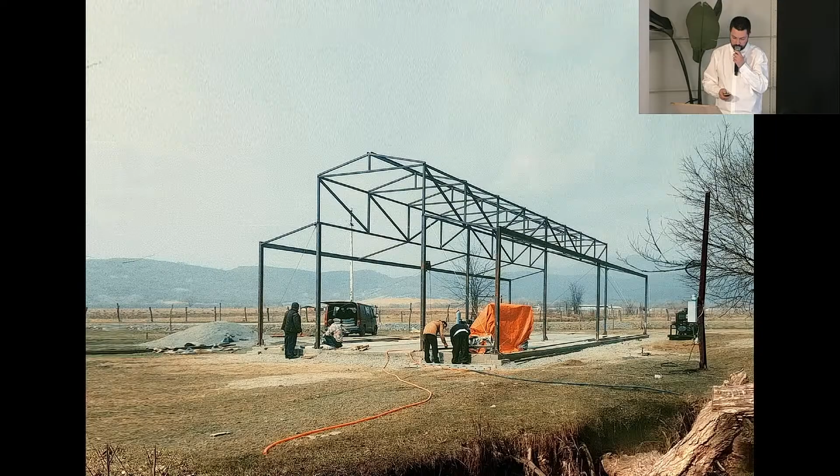The last project in this series, and in this lecture, is for this community temple barn, which started like this. The guys needed a space, so we created for them a series of little houses, and they also built multiple themselves. But they also needed a place for the community where they could gather, party, use it as a workshop, as a lecture space.

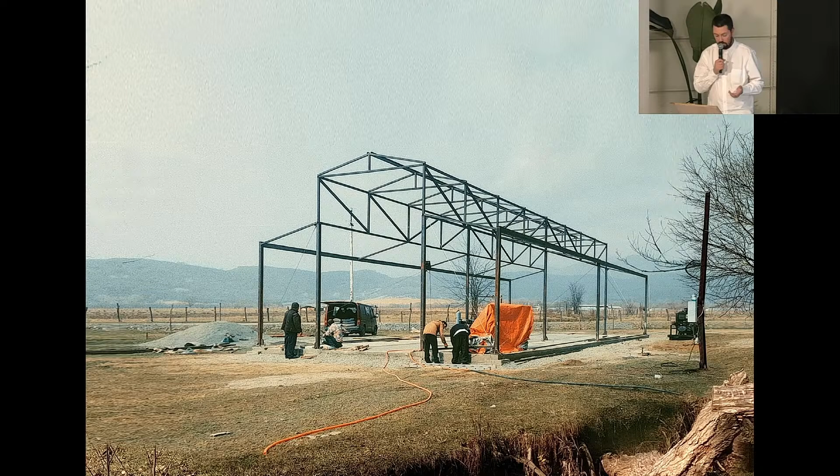By the time they came to us, speaking about working with the existent, they had already bought a prefabricated agricultural shed, and even decided to start building it when they realized they actually didn't like it. That's when we got the commission. By the time we were thinking, they had started to clad it with ugly local sheets, and chose probably the most generic and not the nicest color.

We sometimes call this project the temple barn, or how to make a community space with a bucket of white paint. We realized the quite nice moment of painting this simple corrugated metal, taking as a reference one of the most beautiful Florence churches. Again using the community and uniting it, we gave them a task to paint this little barn, this little workshop space.

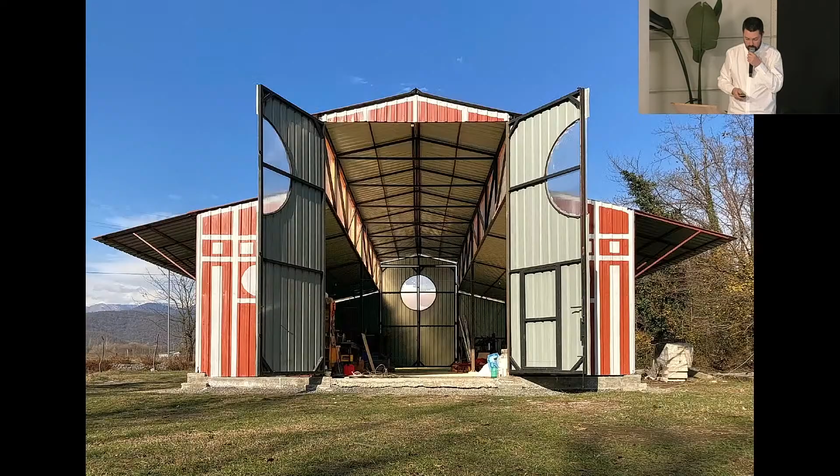Inside, a bit like the logic of Emma, we decided not to change anything and to keep its basic appearance, because we found it, the way it was already pre-designed, quite beautiful. Now they are using it as a storage and workshop space, a space where they gather for activities - a lot of handwork, meetings, celebrating, making shashlik, drinking, celebrating birthdays. Interestingly, this white pattern rhymes with the, not very often, snow in this region.